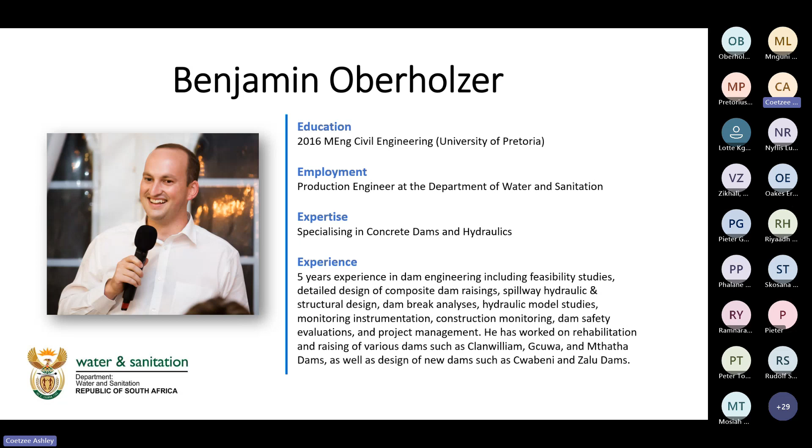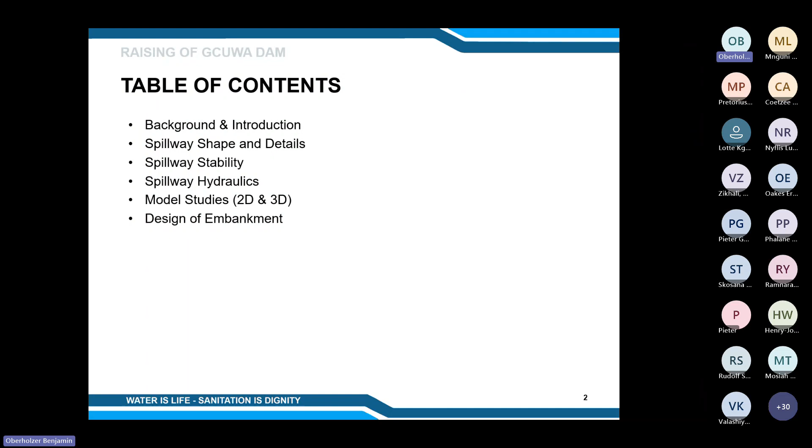It acts as a balancing dam for the town of Butterworth. Upstream, there's a larger storage dam, and water is released down the Gcuwa River all the way until the Gcuwa Dam, where it is retained and then released to the water treatment works at Butterworth. So it's used mainly for domestic water at the town of Butterworth.

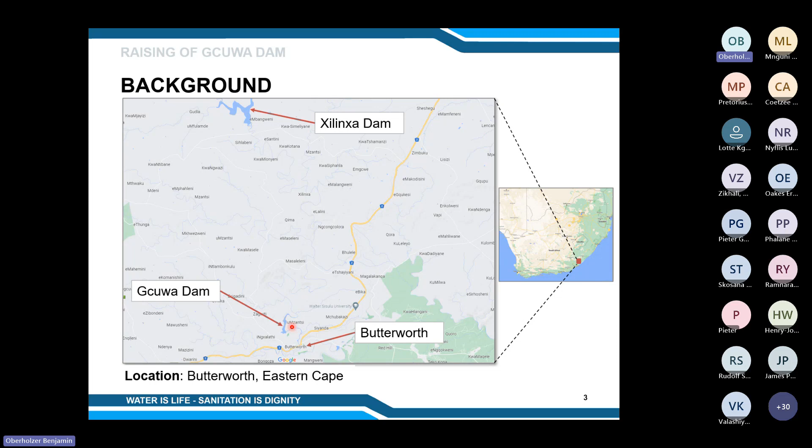Just note, I'm going to be using left and right as we are used to using them in the field of dam design. That's from the viewpoint as if you are standing on the intake tower and you're looking downstream. The right would be like where the spillway is situated, and the left would be towards the embankment. So that's the terminology I'm going to use for the duration of this presentation.

So Gcuwa is a category 3 dam. It's a medium height classification, but a high hazard classification because the river downstream passes directly through the town of Butterworth. So it's categorized as a category 3 dam.

It was constructed in 1972 and subsequently rehabilitated in 2008 to provide it with some additional flood handling capacity. The storage initially was 1.75 million cubic meters, which is pretty small compared to some of the larger dams we have in South Africa. But it's a very important dam for the town of Butterworth. It's their main source of water, and it's something they value very much.

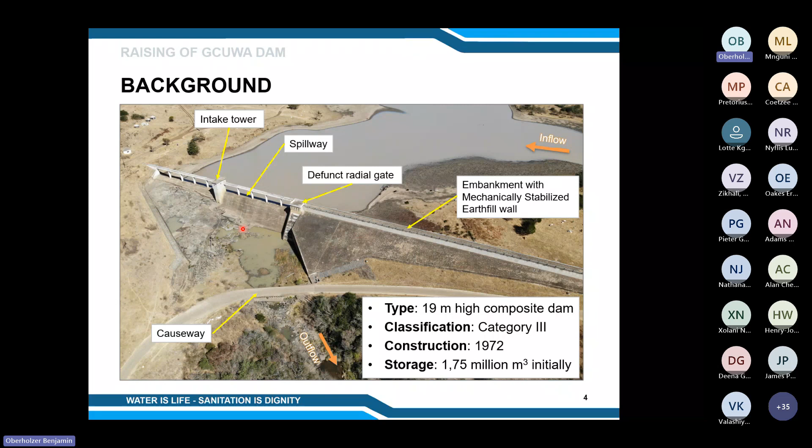So this is a pretty interesting configuration that will have some interesting discussions during hydraulics and stability. So what is the problem with this dam? Why are we raising it?

For those of you who don't know what sediment migration is, it's just sand or other particles washing down the river, and they don't have enough capacity to be taken over the spillway, so they settle down in the dam basin and get trapped there. It reduces the storage capacity of the dam, so you don't have as much capacity to work with.

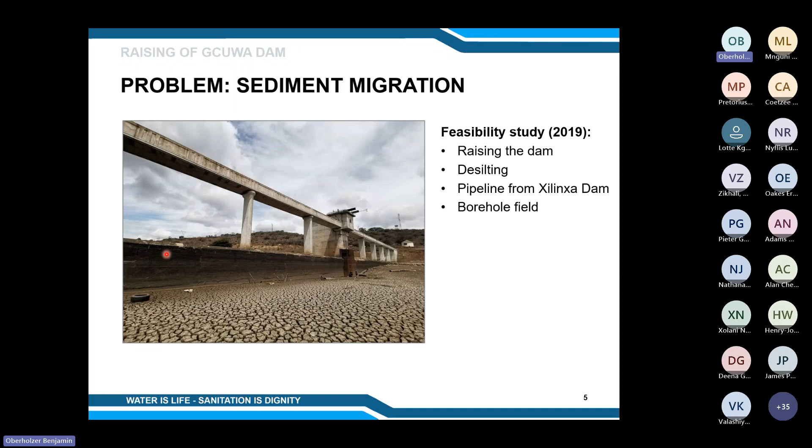So a feasibility study was done in 2019 to decide the best way of reclaiming storage capacity of this dam. We investigated the raising of the dam, which is what I'm presenting now. We also investigated desilting, taking out the silt and depositing it somewhere else. We investigated installing a pipeline directly from Xilinxa Dam to the town of Butterworth, and also investigated a borehole field in the dam basin. Now, from all of these 4 options, the raising of the dam proved to be the best immediate solution. So that is what we embarked on with the detailed design.

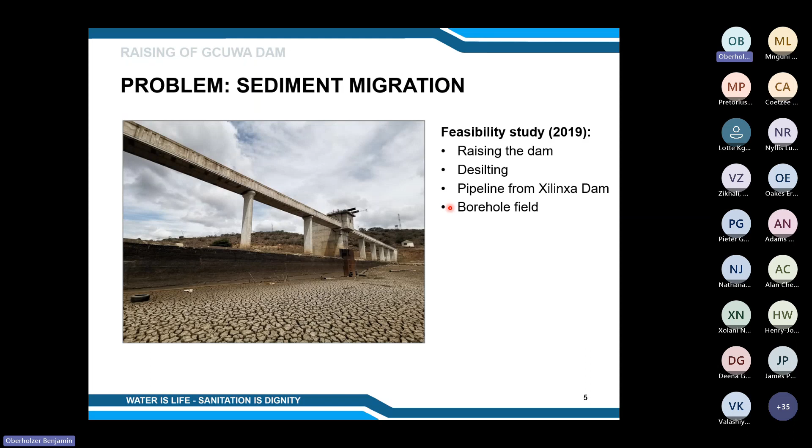Currently, we are at this point in time, and the latest capacity survey showed the capacity to be about 0.422 million cubic meters. So if we raise the dam now, it'll bring the capacity back to 1.12 million cubic meters, giving us about a 30-year time period before sediment will fill up that additional storage capacity again, at which point the problem will need to be addressed again.

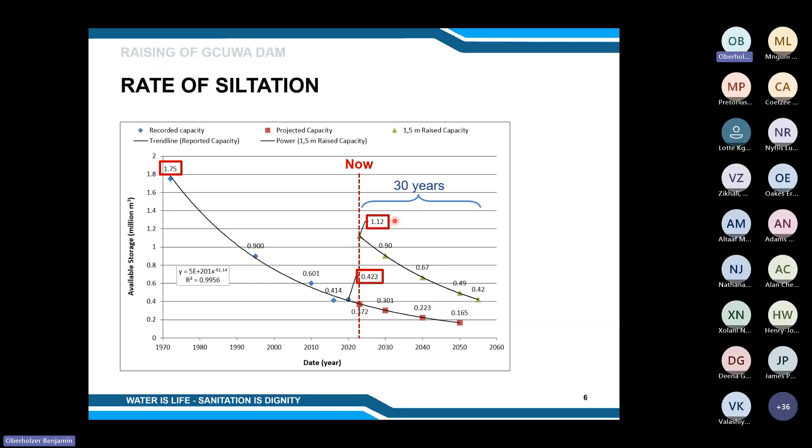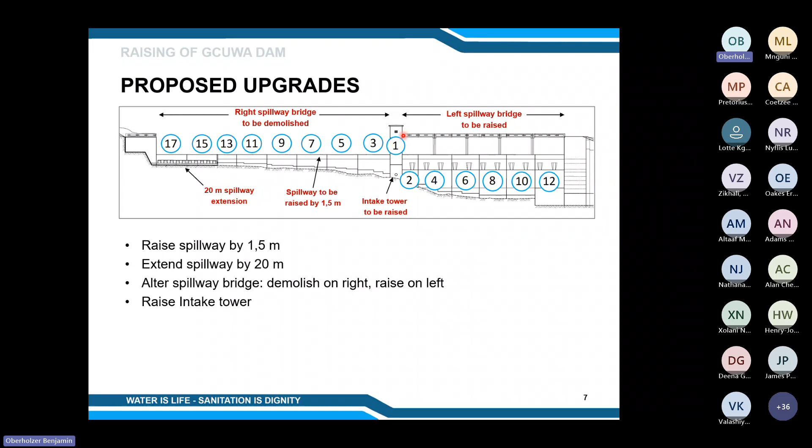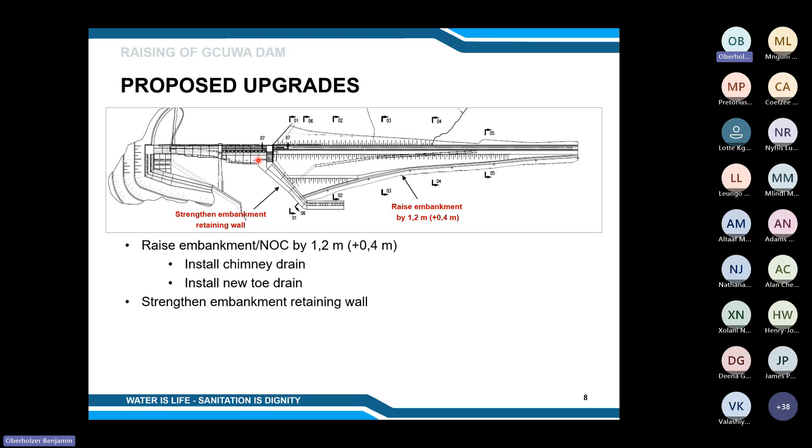So let's discuss some spillway shape and details. As I've shown you before, this is the view from the downstream side, and you can see from this elevation view that on the right-hand side, the depth to the apron is much lower than it is on the left-hand side. This makes for some interesting calculations when doing stability and hydraulics, and it also makes for two different profiles.

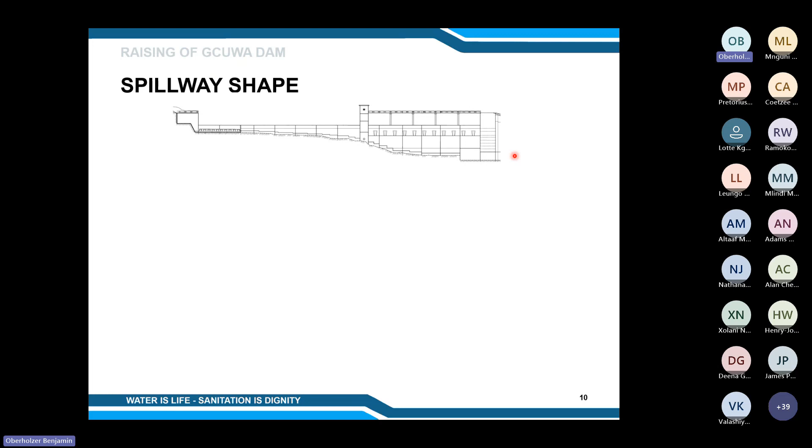On the left-hand side, we have a profile that looks like this. My pointer is now showing the existing spillway, how it looks. And then we are raising it by 1.5 meters. But after doing some stability calculations, we've seen that we need to include about a 3.5 meter step in a downstream direction, just to cater for stability and to give this section enough volume and enough concrete to be stable against sliding and overturning.

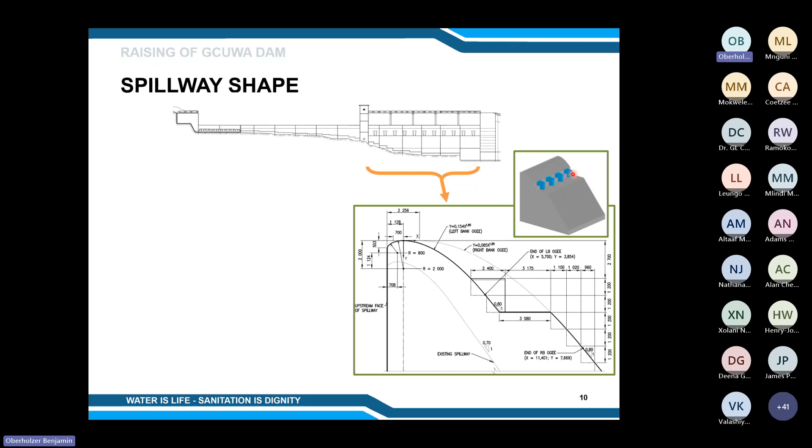Over here, you can see a little 3D model of what the spillway looks like. There's the ogee spillway, we've got the step here, and the downstream face. And here we've included some trapezoidal splitters, which I'll be discussing a little bit more later while we're discussing the model studies.

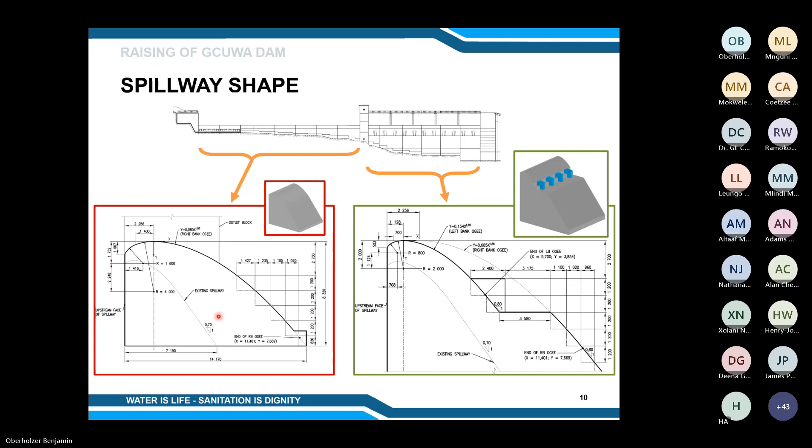Over on the right-hand side, we have a much smaller section, as you can see by the relative size of these two. Here is the existing spillway, what it looks like. And then we're raising the spillway by 1.5 meters, but you'll see that it's a much flatter ogee curve than on the left-hand side, and this is also due to stability calculations. For this section to be stable, we had to make it a little bit wider, a little bit fatter, so that it can withstand forces from water in the dam basin. I'll also discuss that a little bit later on.

So the problem with adding new concrete is once that concrete starts to set, it wants to contract, and that induces some tensile pressures in the concrete itself. That can then be transferred onto your existing spillway, which is a case that has most likely not been designed for.

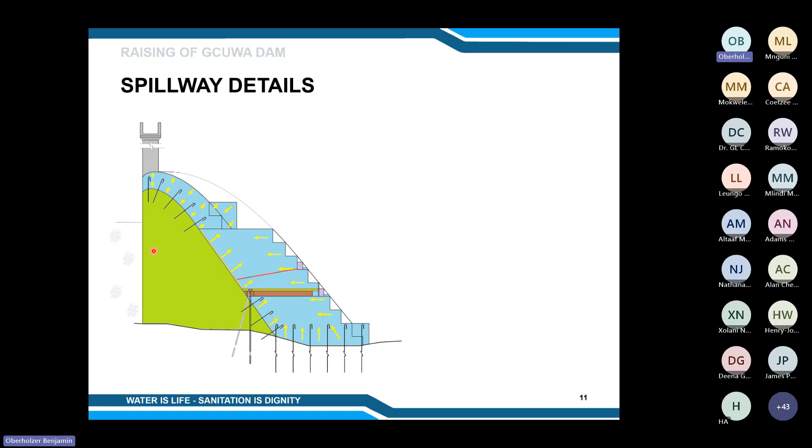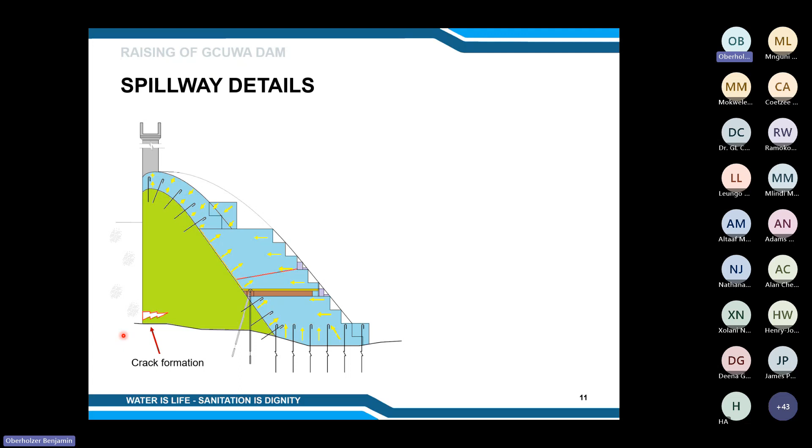If tensile stresses are transferred onto your existing spillway, that could lead to crack formation, maybe down below or anywhere on this upstream face, which is not a good idea. So to combat that, we are using a fixed and a sliding joint combination.

I'll explain them both now. The fixed joint is at the top here and also here at the bottom. The fixed joint is doweled into the existing spillway in a way that encourages bonding. We are also preparing the surface to encourage bonding in that area. So this part at the top here and this bottom part is fixed and doweled into the spillway.

But then when this concrete starts to contract and needs a little room to breathe, we have a sliding joint here, and that's the whole purpose of the sliding joint, to allow some breathing mechanism for the concrete, so the stresses are not transferred onto the existing spillway. This surface is prepared in such a way to discourage bonding from taking place.

And we're also fitting it with a drainage section at the bottom, which I'll be discussing next.

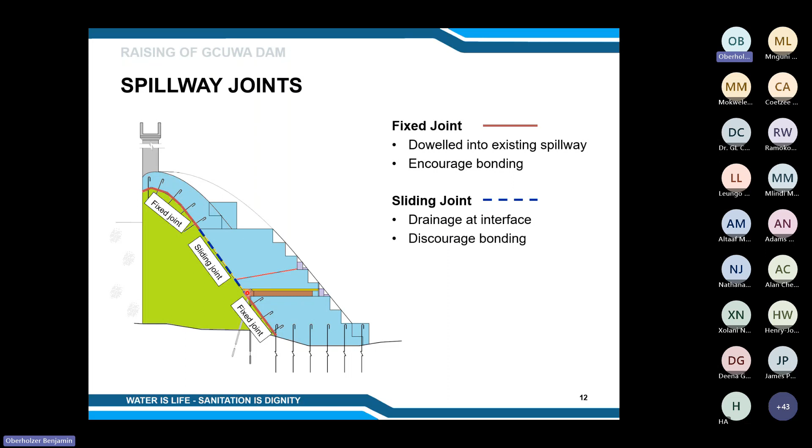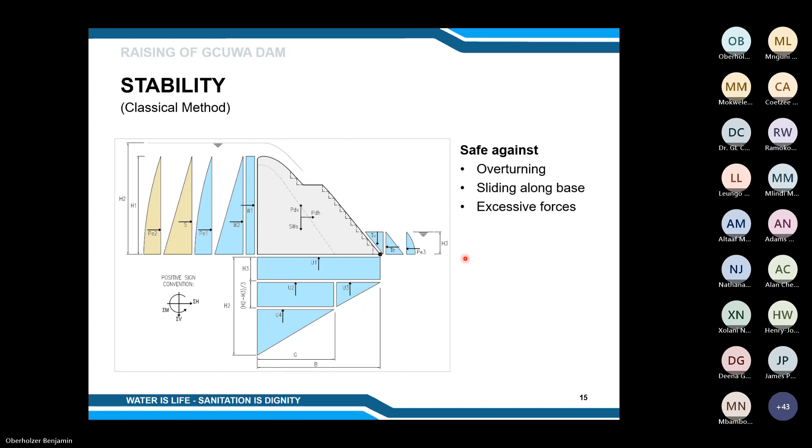Interesting thing to note is the sliding joint section in the middle. It needs its own stability analysis, because any water entering through a weak point in this contact would come down and sit right at the back of the spillway of the sliding joint, and then this point would experience the exact same pressure as this point here in the dam.

We all know that water pressure depends on the vertical height of the water above the point at which I'm measuring. So this sliding joint will be subjected to nearly the full force of the water in the dam basin should any water leak into here. For this reason, we did a stability calculation of the sliding joint by itself and shown that it is safe: it won't be overturning, it won't be sliding along its base, and also won't be experiencing excessive forces.

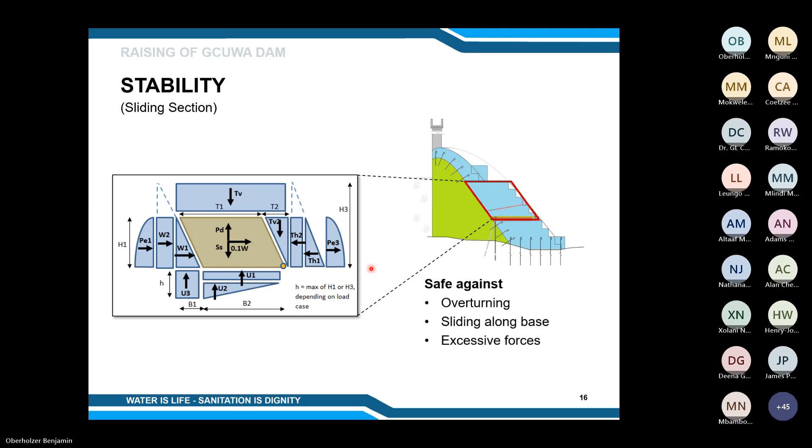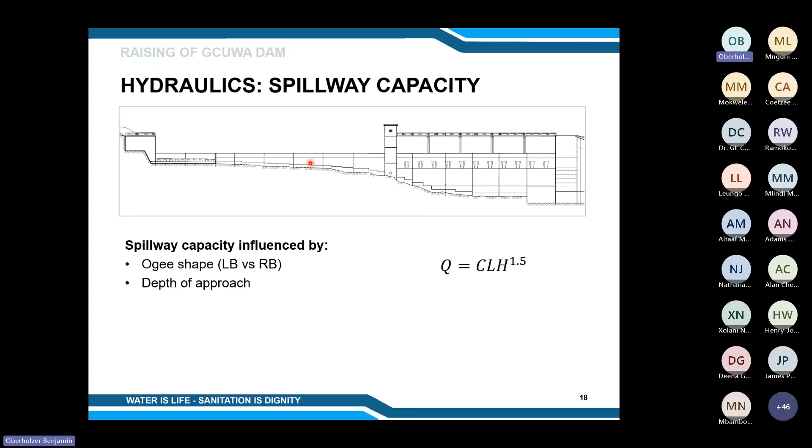But there are certain factors that influence the spillway capacity, such as the ogee shape. We have a different ogee shape on the left-hand side than on the right-hand side. The depth of approach, if you paid attention on that sediment image I showed, is different on this side than on this side. The depth of the apron is much different too—much higher here than on the right-hand side. And also the tailwater level has an influence. So it's difficult to assign one value for each of these criteria in your spillway discharge calculation.

So what we did was split up the ogee into 4 distinct regions, each with its own criteria, and then we solved those 4 equations simultaneously. We had 4 different ogee profiles, each with its own parameters according to this criteria, but all having the same H, or height above the spillway crest, and we solved those 4 equations simultaneously to arrive at a spillway capacity.

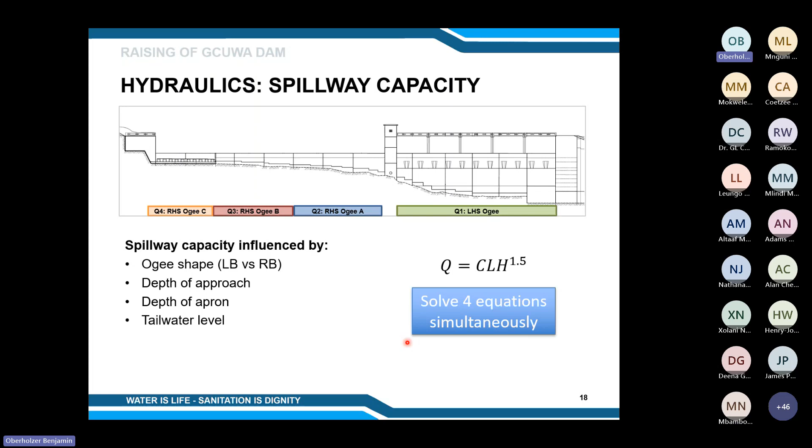So talking a bit about flood routing. We did flood routing at the dam. For those who don't know what it is, it's just routing an incoming flood through the dam and seeing how the water level in the dam reacts to that.

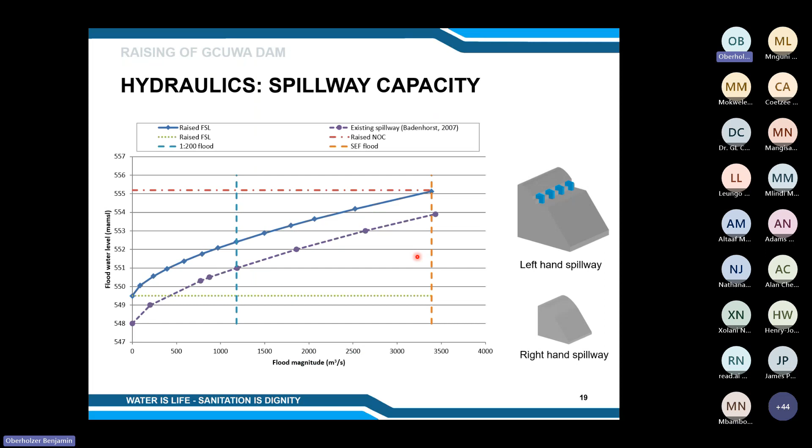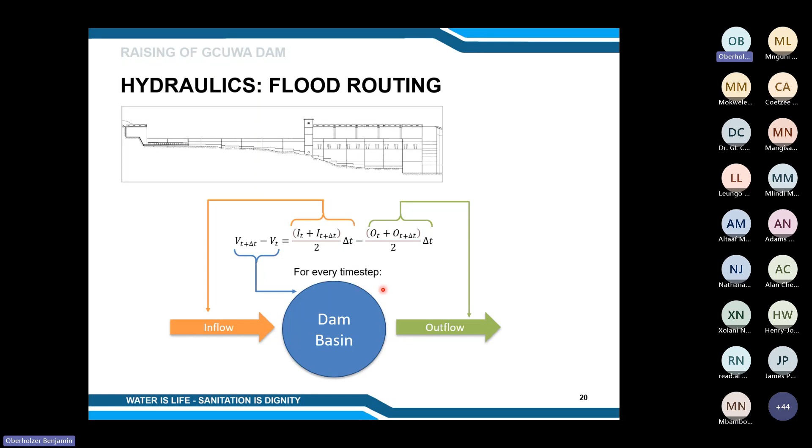So we regard the outgoing flood as being the same as the incoming flood. There are also guidelines by SANCOLD that say if the attenuation capacity is this low, then you should take the entire incoming flood as the outgoing flood and design for that.

Discussing freeboard, we did calculations according to both the SANCOLD 1990 guidelines and the SANCOLD 2011 guidelines. In both of these, you have various events that happen, and these are combined according to combinations, then added up to give you a height of freeboard that you require. For those who don't know, freeboard is the height above your full supply level to which water can rise, determining how high the non-overspill crest should be. In both cases, the SEF flood was the most critical, largely due to the dam not having any attenuation capacity. So we went for a freeboard of about 5.7 meters, which we are still revising by doing a 3D model study.

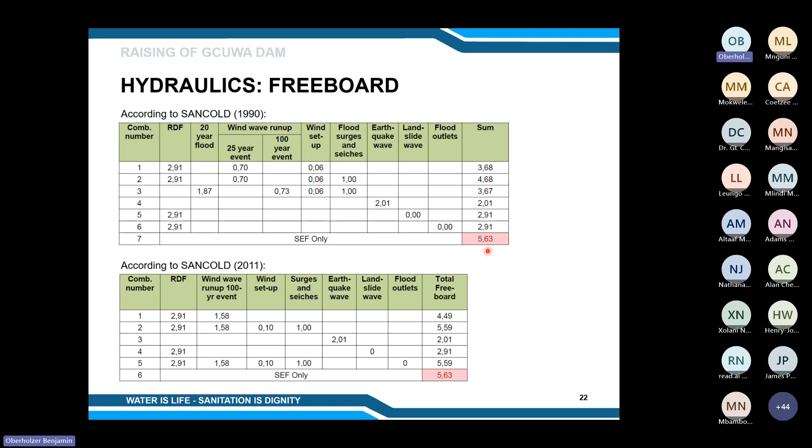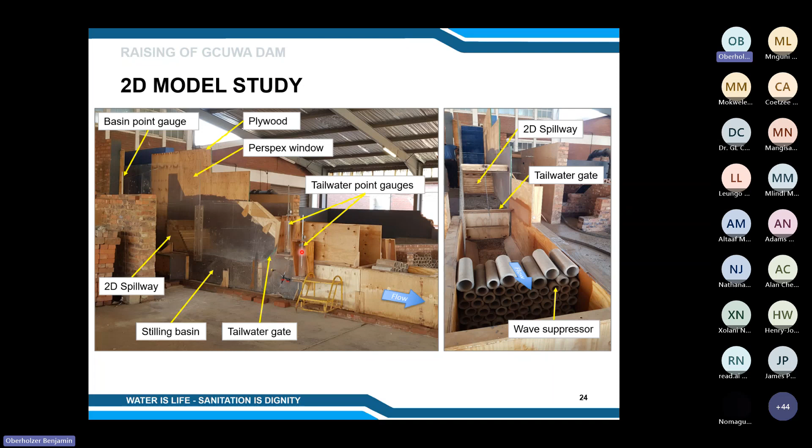Water levels are measured using point gauges. There's one up top sticking out behind the brick wall, which measures the water level in your dam basin, or the head on the Ogee crest. Then there are two point gauges for measuring the tailwater levels. The main point of this was to check the actual capacity of the spillway against theoretical calculations.

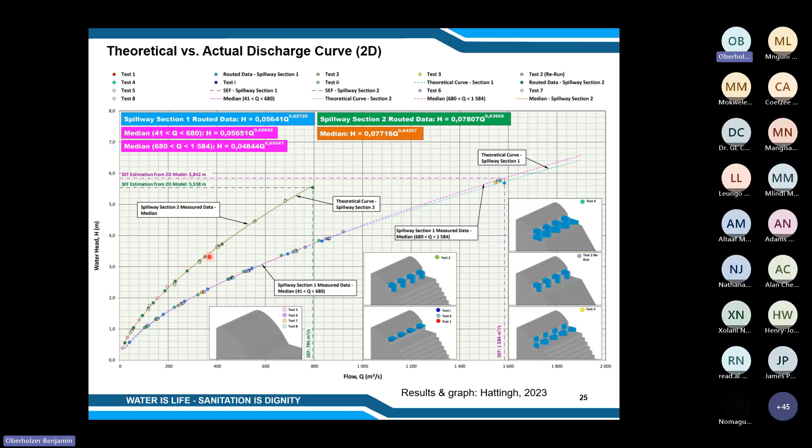So I'm going to discuss the protrusions that we also tested. This was a secondary aim of the model study. We tested various protrusions, numbers 1, 2, and 3. The first was just a conventional Roberts splitter. These protrusions are used for energy dissipation, so water coming over the spillway passes through these structures, gets aerated, and the energy dissipates so that the water falling downstream is not too destructive and does not erode the apron.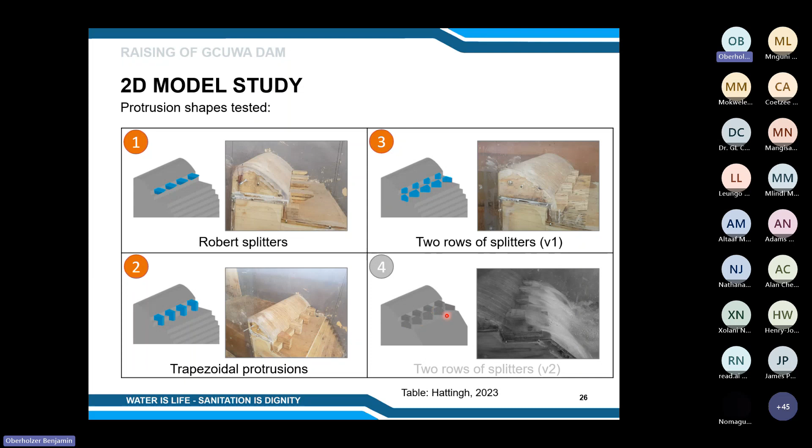Number 2, we have a trapezoidal protrusion, basically a Robert splitter filled in with concrete at the bottom. Number 3, we had two rows of splitters. Number 4 also had two rows of splitters, but this test did not give very good results, so we decided not to include it going forward.

So these 3 structures were then compared using a scoring matrix, which we gave each one a point out of 5, with 5 being very good and 1 being subpar, for various criteria. First one being hydraulics. Number 1 and 2 performed pretty well in terms of hydraulics, performing very similar to one another, while number 3 performed a little bit less satisfactory because it did not reduce the spread of the water by as much as the first 2 options.

Secondly, material volume. Option 1 got the highest rating with 5 because it requires very little material, although it does require steel because of this cantilever behavior, while number 2 and 3 both received 4 because they require a little bit more material and they would therefore be a little bit more costly.

Constructability-wise, option 1 was assigned a 4 because it requires scaffolding to be erected below these structures in order to build them, while option 2 and 3 would be much easier to build because they are on top of the existing spillway, or on top of the raised spillway. You don't need any scaffolding to support them.

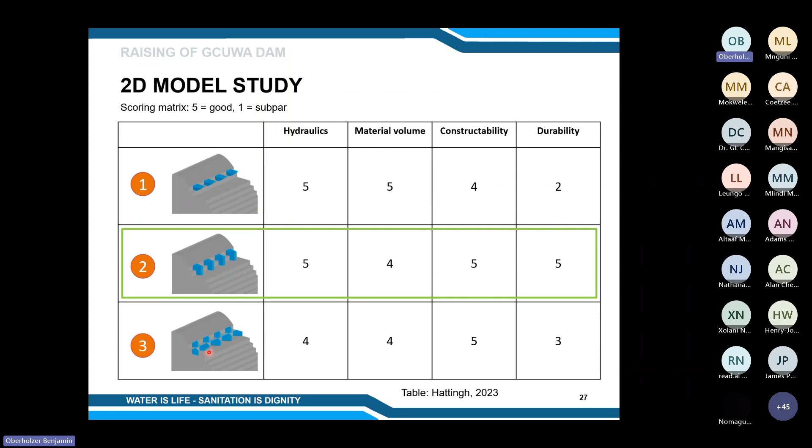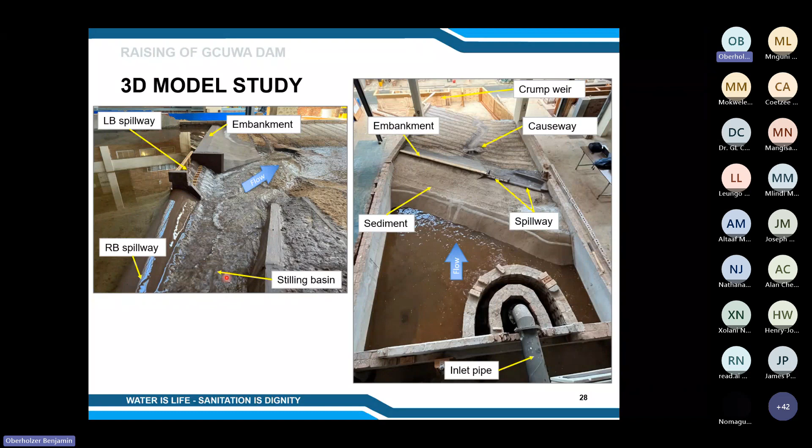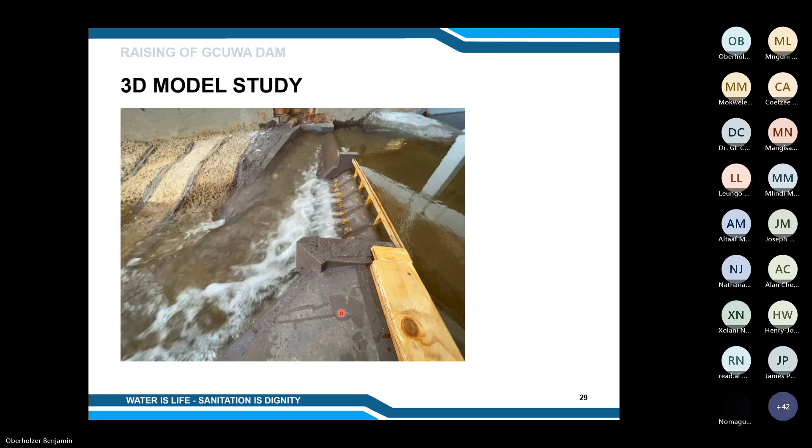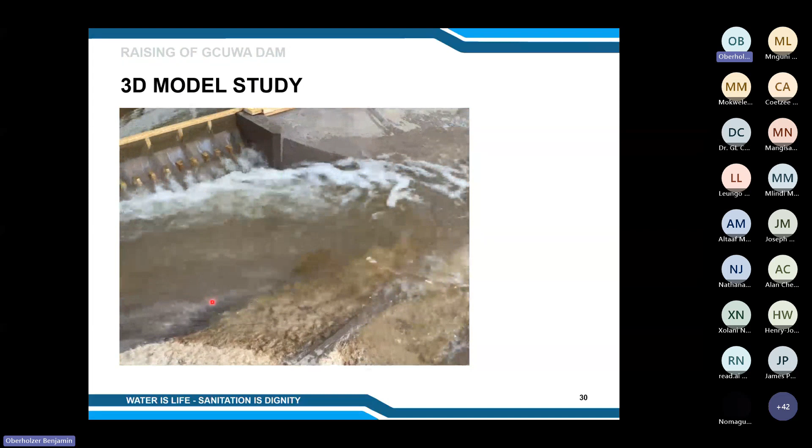This is another video that I'm going to play. It shows water coming over the right-hand side of the spillway, passing towards the left-hand side. You can see here at the bottom that water is totally outflanking the retaining wall that we made for it. It's also outflanking the embankment retaining wall on this side. And down here, you can see the causeway, which is shown to not have enough capacity to transfer the flood.

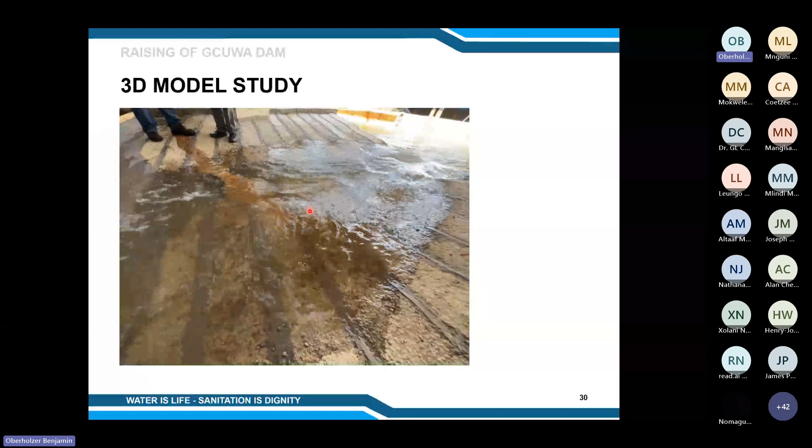Keep in mind that this is a really large flood. I believe this was a 1 in 1,000 flood. So in cases of this, dams are allowed to withstand some damages, but they should not fail according to SANCOLD guidelines.

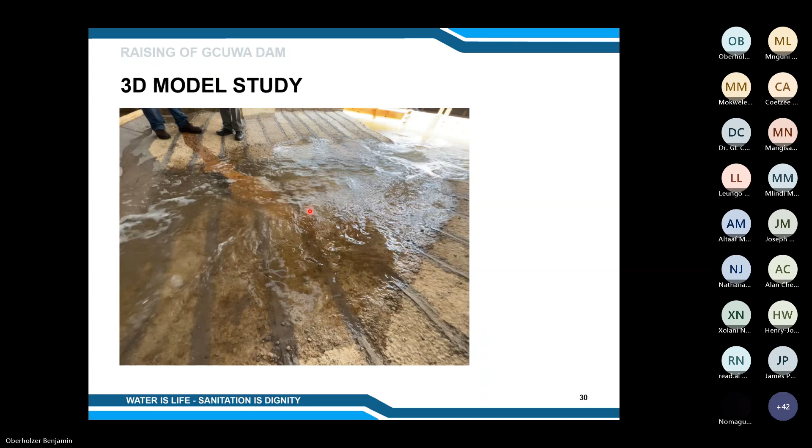This is also the reason why I shared with you earlier that we need to increase the NOC by a further 0.4 meters due to this fact. This might be due to various reasons, like the right-hand side spillway drowning out, and the tailwater levels on the left-hand side of the spillway being a little bit higher than what we anticipated because of the crossflow from the right-hand side, causing the spillway to drown out in general, which requires us to provide more freeboard.

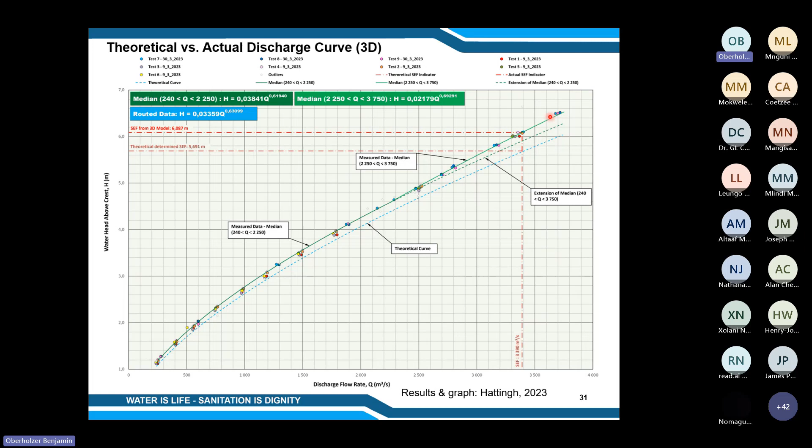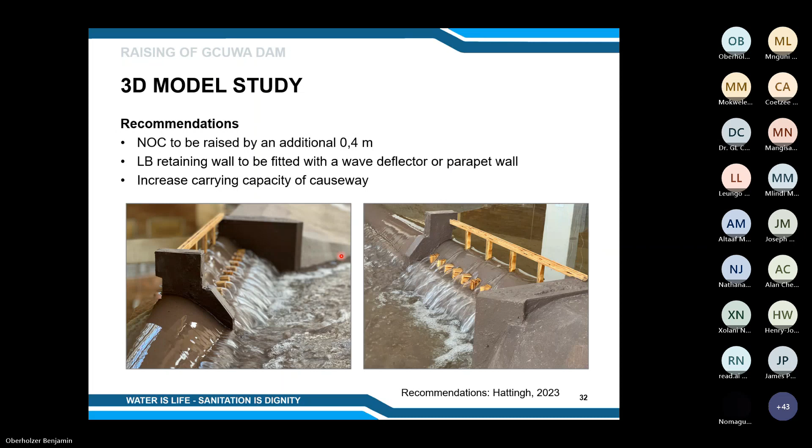So with that, I'm going to give over to my colleague, Londeka, and she'll be telling you more about the embankment.

Okay, the embankment design, which is the part that I was designing, there were key aspects that I had to look into, which were to provide for the required freeboard and also to stabilize and improve the safety of the embankment. With that being said, a 1.2 meter high parapet wall was proposed to safeguard against overtopping, as Gcuwa Dam is an earth embankment dam.

In addition, a filter drain and fill material on the downstream slope of the existing embankment was proposed to stabilize and improve the safety of the dam, and also riprap on the upstream slope of the dam.

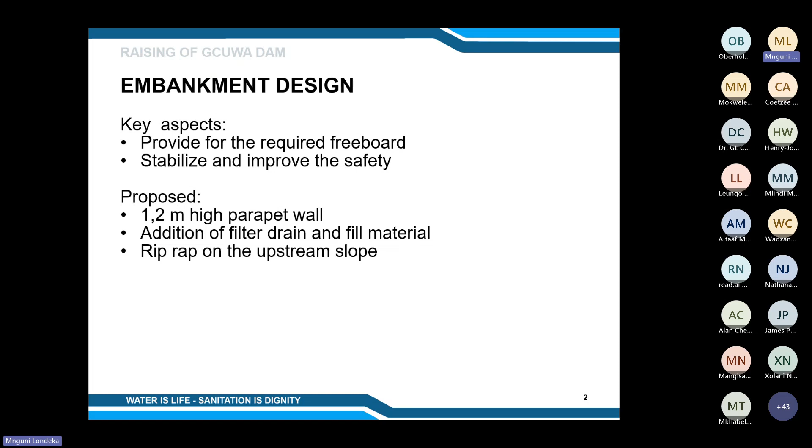Okay, zooming into the configuration of the embankment, as I have said, the 1.2 meter parapet wall, as can be seen, and also the filter drainage, which is a chimney and blanket drain, that will be 1 meter thick. This will be augmented by a filter geotextile.

Also, the additional fill material having a slope of 1 vertical, 3 horizontal, which is protected by the 300 millimeter thick crusher run. This is the 75 millimeter stone size that we'll be using. And the upstream riprap on the upstream slope of the dam.

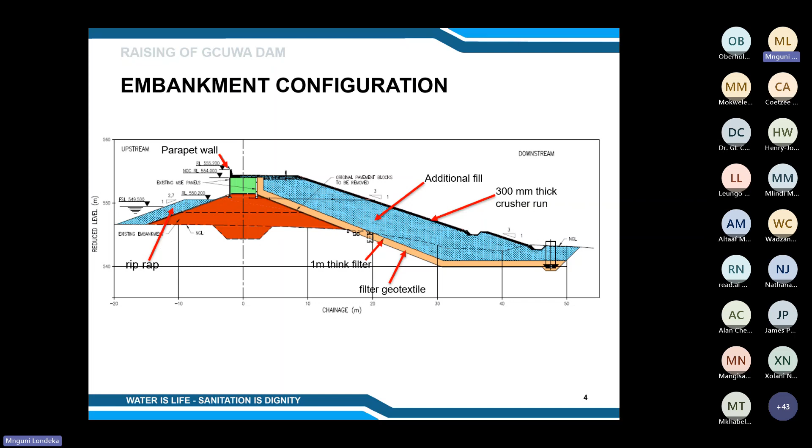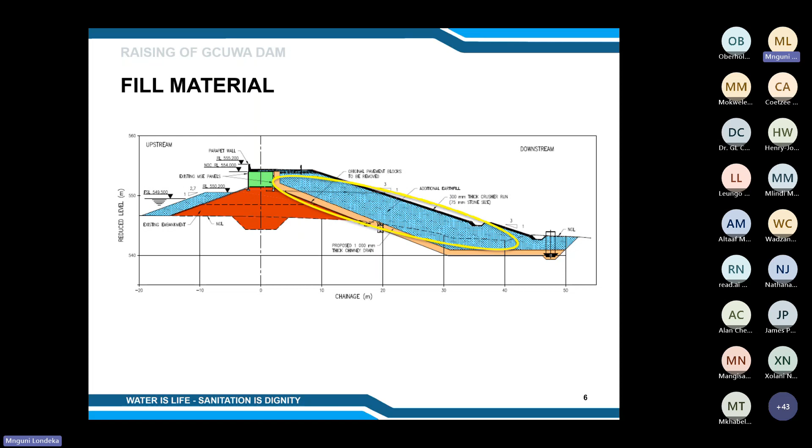Going further into the additional fill material, the key aspects that were taken into consideration in the design of this fill material is that we had to consider whether it should be earth fill or rock fill. And with the rock fill, we had to look at the founding levels for the rock fill that is required, and this was hard rock or moderately to slightly weathered bedrock.

And this level required deep founding depths, ranging from 10 meters to 16 meters. From the geotechnical investigation that was done, it was found that there is a water table that exists at a depth of about 7 meters. So the use of this material is going to lead to large excavation depths and having to deal with water during construction.

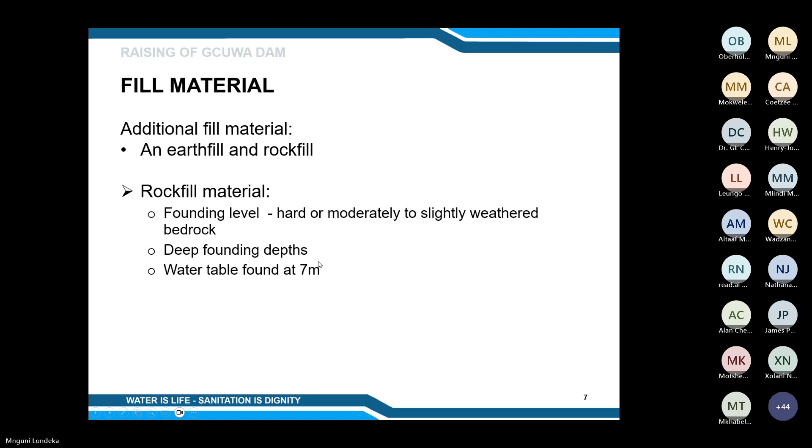Now looking at the earth fill material, it had to be founded on residual metasandstone on the lower left flank of the embankment, which is ranging to a depth of up to 3.5 meters. And on the upper left flank of the embankment, it had to be founded on highly weathered residual dolerite, ranging to a depth of up to 2.5 meters.

The use of this earth fill material was more favorable in that the excavations are more shallow.

Initially, the proposal was to use the earth fill material that is of semi-pervious nature as the additional fill because of its benefits in terms of permeability. However, from the geotechnical investigation, it was found that there isn't enough of this material available within the borrow areas that we looked at, which were within the dam basin. And a large bulk of the available material was more of an impervious material.

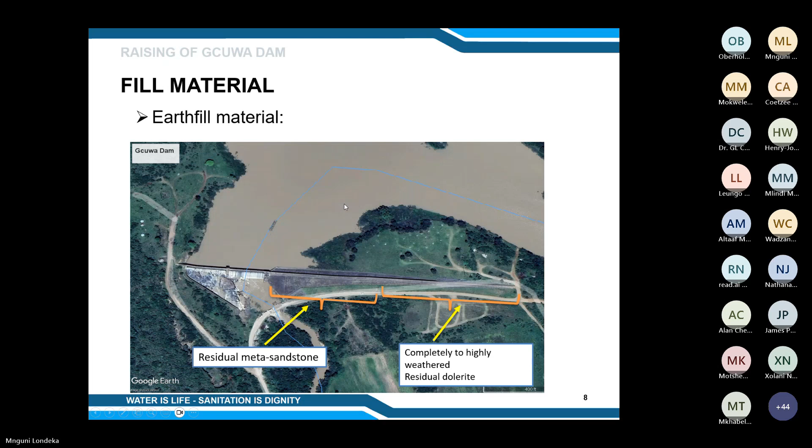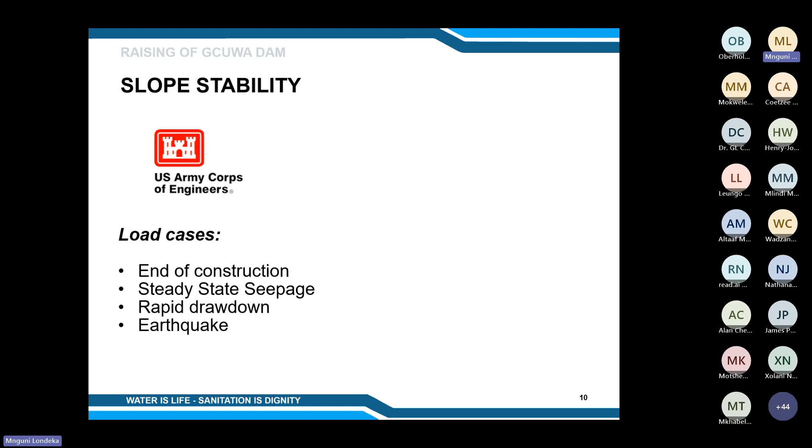Now, zooming into the stability of the embankment, the load cases considered were according to the U.S. Army Corps of Engineers: end of construction, steady state seepage, rapid drawdown, and earthquake loading. We also had our own approach from our design criteria memorandum, which included rapid drawdown with seismic loading, and end of construction with seismic loading.

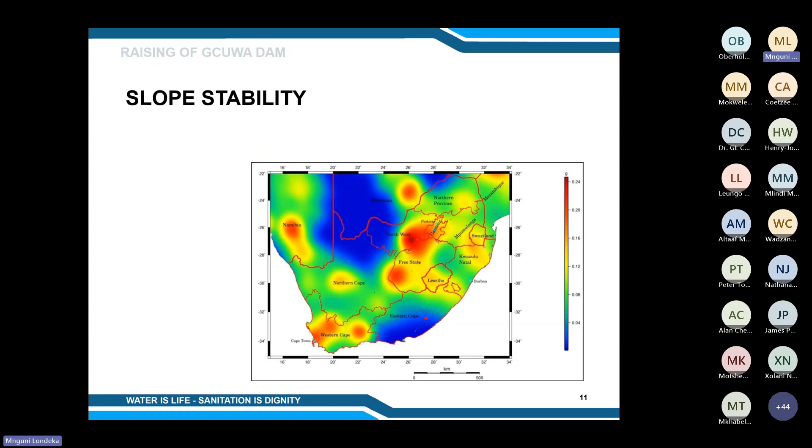According to the seismic hazard map of South Africa, the site-specific peak ground acceleration for Gcuwa Dam site is 0.04, and this value was used as an operating basis earthquake.

Now, looking at the material parameters, we had to adopt from the geotechnical investigation the drained material parameters, which were used for the steady state seepage condition. This means all materials here are considered drained and effective strength parameters are used. The geotechnical study made a recommendation that for the homogeneous existing material, its effective parameters, for design purposes, we had to adopt zero cohesion for the steady state condition.

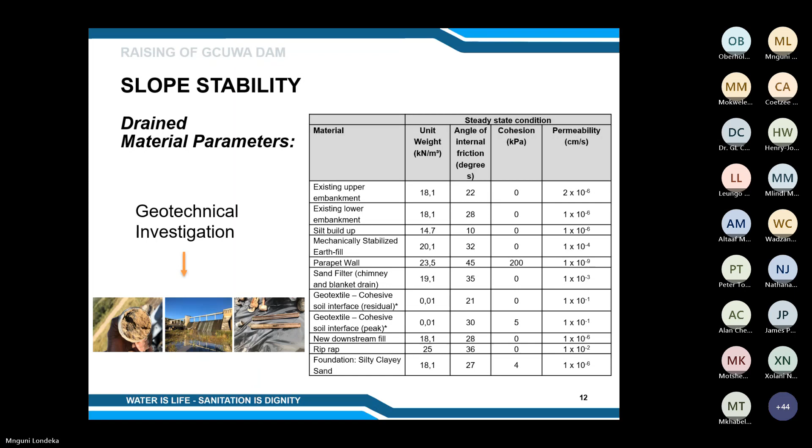Looking at the undrained parameters, relating to the end of construction and rapid drawdown conditions, the undrained shear strengths were used for fine-grained materials with low permeability, while effective shear strengths were used for free draining materials. For the end of construction case, an Ru factor of 0.1 was assigned, to account for pore water pressures during construction as the material is placed.

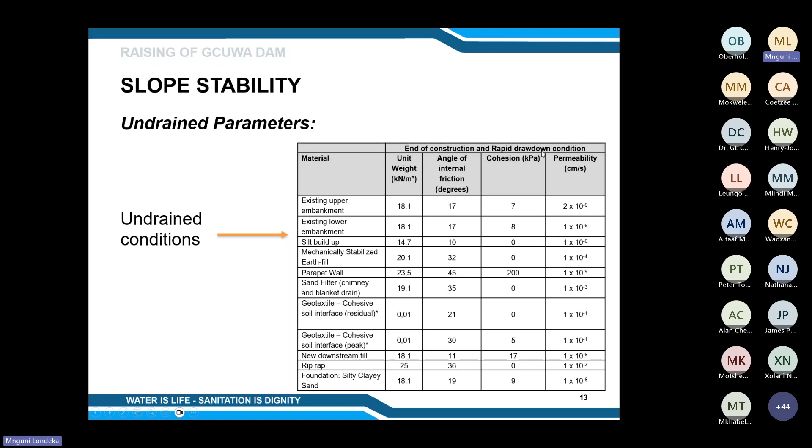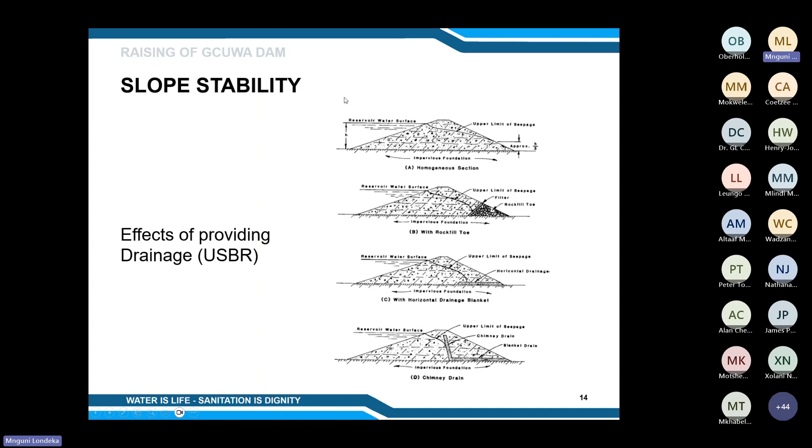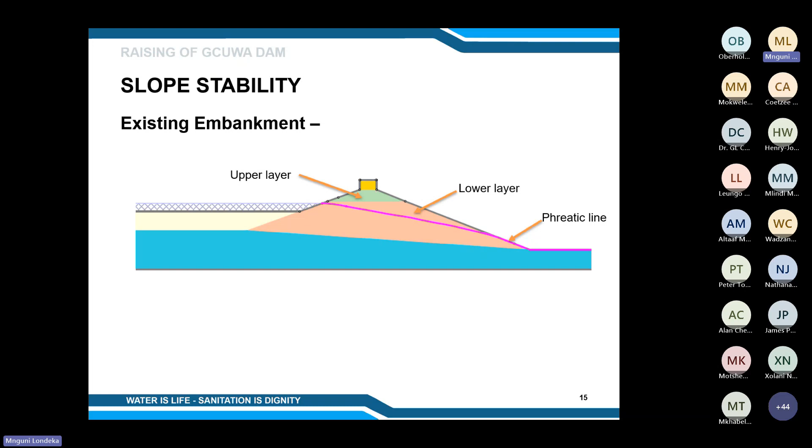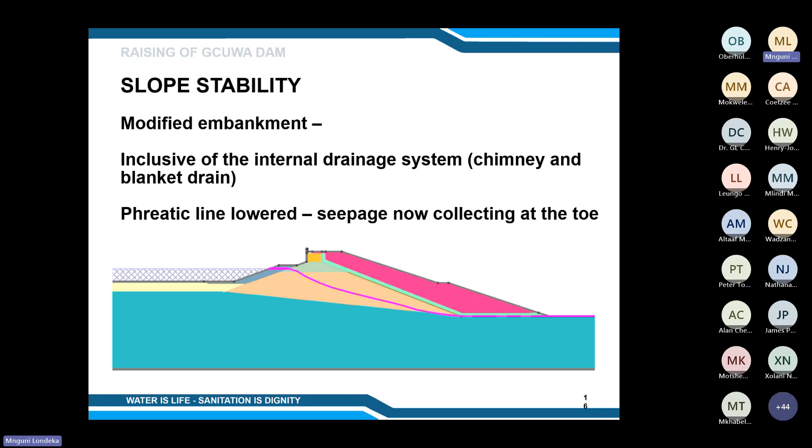Now looking at the modified embankment, where we now introduced an internal drainage system, this is a chimney and blanket drain. There was a change in the phreatic line being lowered, allowing us to collect seepage at the toe of the embankment, which was selected as our collection point. So the internal drainage system was providing for conveyance of seepage to collect at the selected drainage point, managed at the toe of the dam.

Now, going into the slope stability analysis, the load cases, as mentioned earlier, were now analyzed using the limit equilibrium methods. These are methods that use the method of slices, where Mohr-Coulomb criterion is applied to calculate the factor of safety. The results demonstrated that the design raising satisfied all the minimum required factors of safety.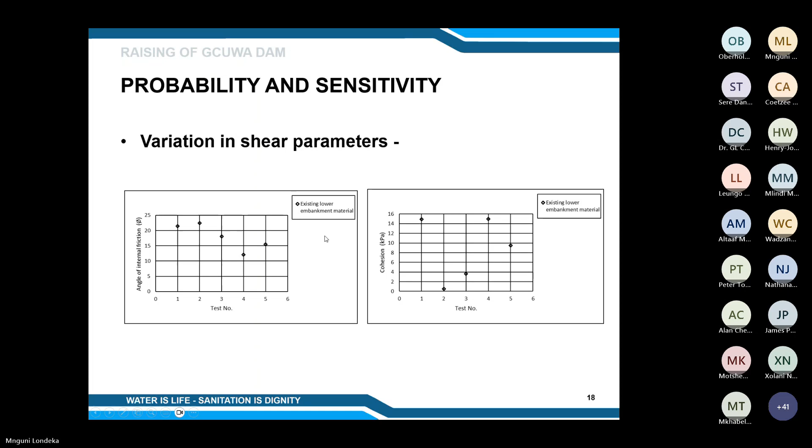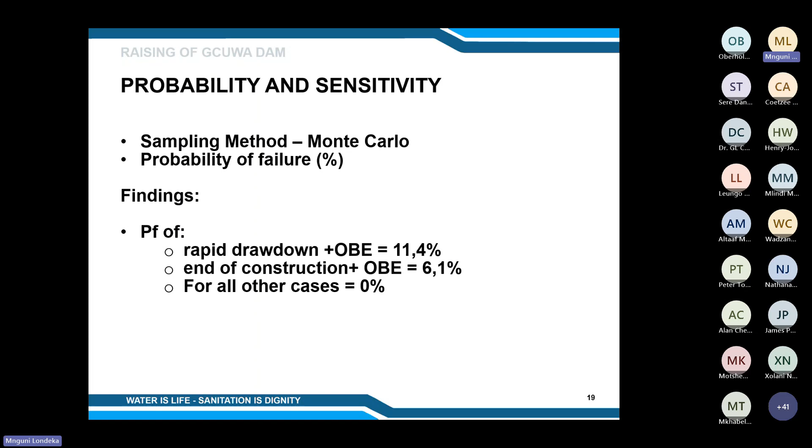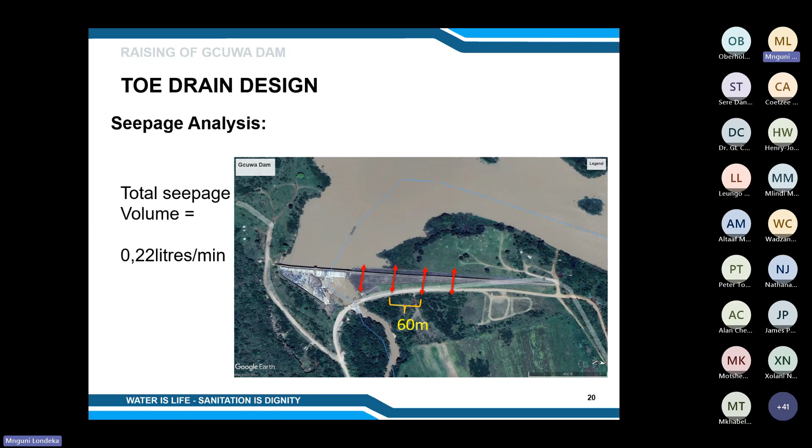Now, zooming into the toe drain design, we looked at the seepage analysis, where we need to estimate the amount of seepage that will need to be managed. Here, 4 cross sections along the length of the embankment, spaced at 60 meters apart, were taken into consideration. Using the Slide Rocscience software, the seepage at each cross section was estimated, resulting in a total volume of seepage of 0.2 liters per minute. Knowing this information allowed us to provide the required drain pipe size that would be able to drain the seepage and maintain it at the toe drain.

Now looking at the drainage of the storm water of the embankment.

Zooming into the crest, we have a parapet wall on the upstream side. The idea of having a parapet wall was to act as a barrier for the different floods we might experience for this dam, up to the SEF flood. The drainage for this dam was designed to drain to the downstream side of the embankment, because we couldn't drain to the upstream as normally done, since it's an embankment dam, an earthfill dam, where we don't want overtopping to happen. We have to safeguard it against overtopping, so this parapet wall had to be designed to be watertight.

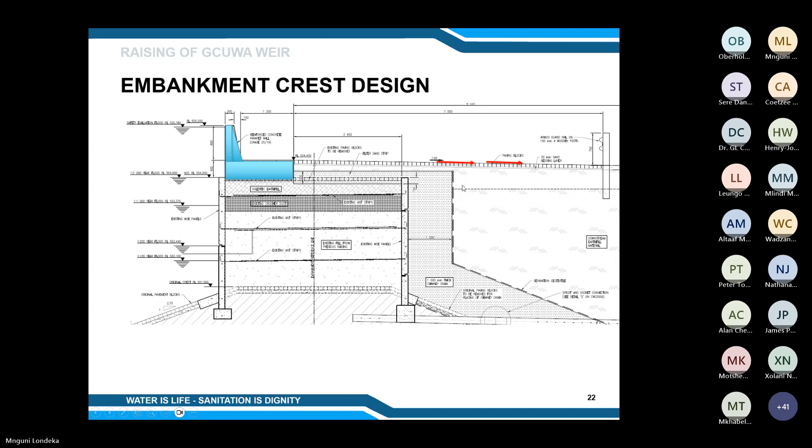Lessons learned from this analysis: the overall embankment design was driven mostly by slope stability, where we performed probability analysis and found probabilities exceeding 1%. These cases were accepted, taking into consideration that rapid drawdown with seismic loading is quite a severe load case, mostly applicable to dams used as pump storage. With that, this covers the embankment design part for Gcuwa, for the raising of Gcuwa Dam. Thank you.

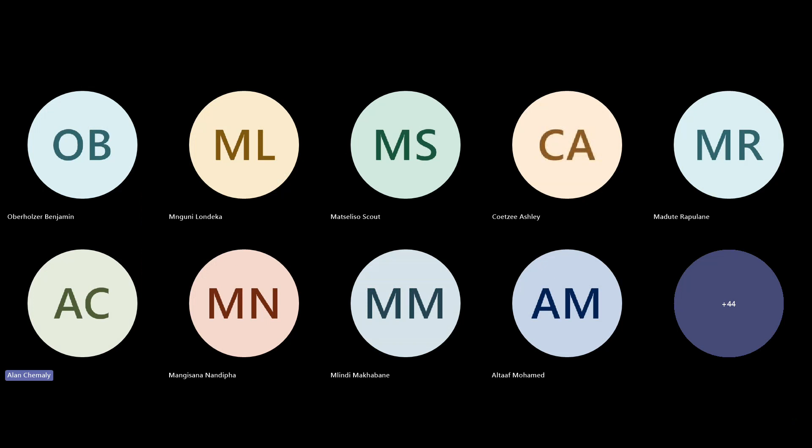It's where your drain holes into the rock mass of the foundation intersect your semicircular drains going out horizontally. Is this the correct image?

It's loading at the moment, Ashley. There's a lag in the signal. It's still loading.

Okay, I will describe it. Benjamin, your drain holes into the foundation are most probably 75 or 100 millimeter diameter holes going into whatever depth you as designer have deemed necessary into the foundation and rock mass. I understand that then meets semicircular pipes to let any seepage flow out horizontally, bearing in mind the life of the dam after this will be 30 years, or could be 30 plus. Over that period, as with most dams that have galleries, there is provision not only to re-drill those but to ream those holes. I would have thought it would be best to extend that pipe where it meets the circular horizontal hole, extend it to the step above, and have a provision with a collar and a cap that you can unscrew, level with the horizontal of the step, so there'd be no cavitation problem. Then in years to come, when you want to check several of them, you could just unscrew the cap, ream it, or flush out the holes.

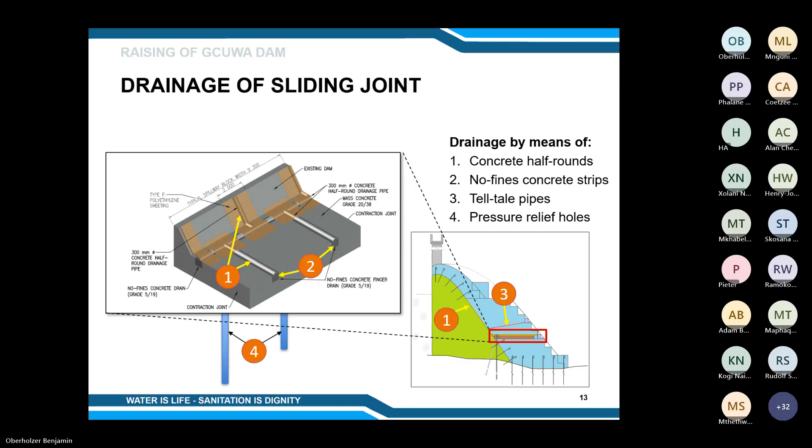So our calculations, or the feasibility outcome, was largely a financial one. In the feasibility study we checked the cost estimate for all four options, and desilting of the dam turned out to be much more expensive. I think it was more than double what it would cost to raise the dam. At first this quite baffled me, I couldn't stomach it well, but in other literature we also found the same trend, that desilting the dam costs much more than raising it.

Well, even if you could get the funds, it's also a matter of where you put the sediment. It's quite an environmentally touching subject - what do you do with this silt? Some say you could use it for fertilizer or brick making, but you'd need a market to get the silt out and use it somewhere. You can't just go dump it anywhere. So in terms of order of magnitude, I'd say maybe a factor of 2 or 3 that raising was more preferable, purely based on cost.